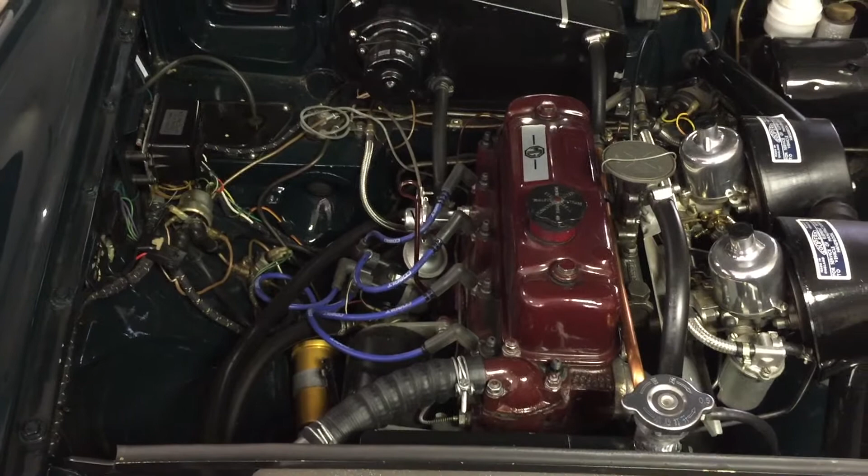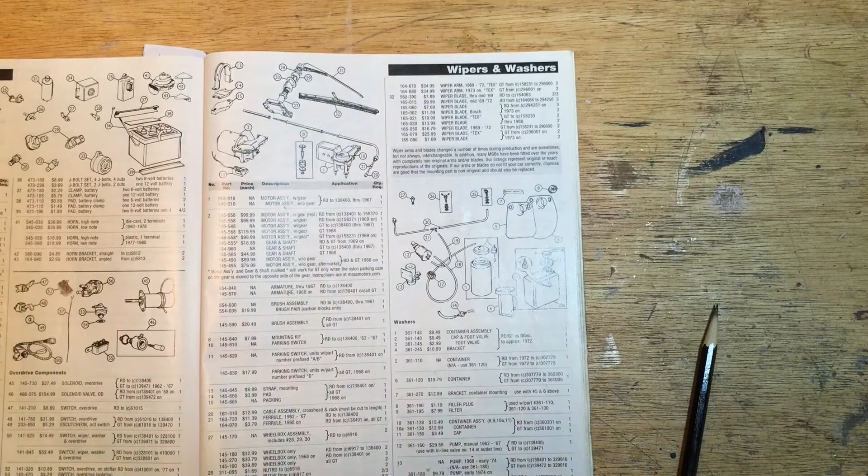So it looks like we don't need to repair the window washer, we need to put one in. So we will go to the Moss catalog and look at the diagram of the washer pump assembly and what we're fixing today. Here is the manual pump, the button that you push.

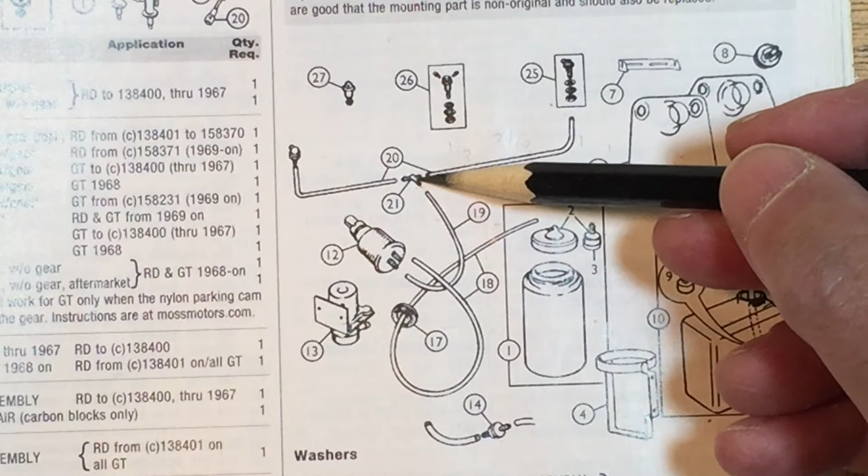Coming off the back of the pump, you have two fittings. One goes to a tube that goes to a T-connector, and from that T-connector, a tube goes to the jet assemblies. The other connector on the back of the pump goes to a tube that leads to the water reservoir.

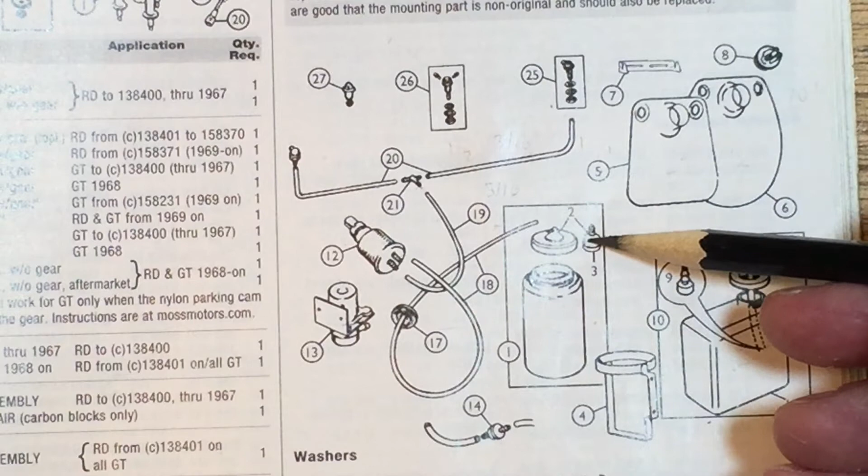The water reservoir has a cap and it has one-way foot valve. The one-way valves are important because this pump has no directionality. When you push the plunger in, water squirts out, and when you release the plunger, water gets pulled back in. So the water just goes back and forth and has no forward motion unless you put a one-way valve in it.

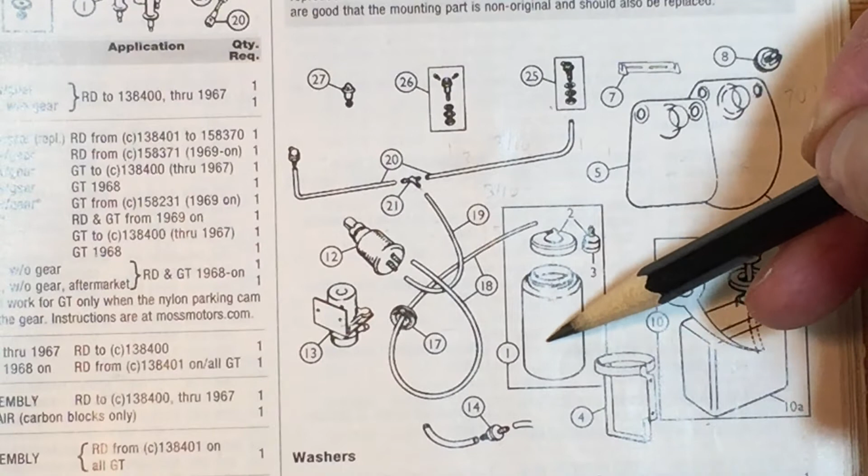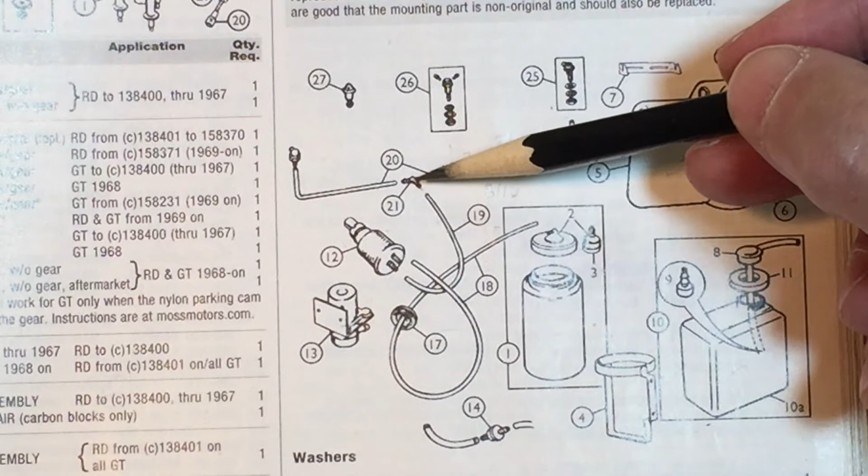The one-way valve in the water reservoir only lets the water go up towards the pump, and the one-way valve pictured here, there's a one-way valve that actually should be pictured here for the sake of clarity, because that valve lets the water go away from the pump but not come back towards the pump when you release the button. Another thing worth noting is this T-connector is 3/16, 1/8, 1/8.

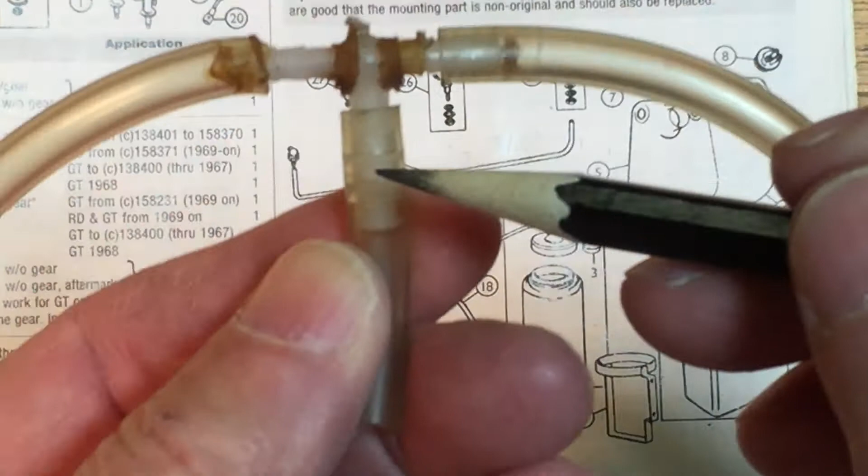Here's the bag that it comes in, and you'll see T-connector 3/16, 1/8, 1/8. Well, what does that mean? It means that this connector is 1/8. Correction, this connector is 3/16, and this one is 1/8.

And this is actually the T-connector that was under the dash. Parts of this system were still in the car. Most of the system had been taken away. And I think it's because they didn't have any one-way valves that their system quit working, and they just threw away the water reservoir.

But let's talk about this size for 1 second, which would make a difference. And sure enough, if you look at what was on the car, the fitting to the intake part of this T-connector is 3/16, and the tubing's pretty tight. You can just put it on there and it won't come off.

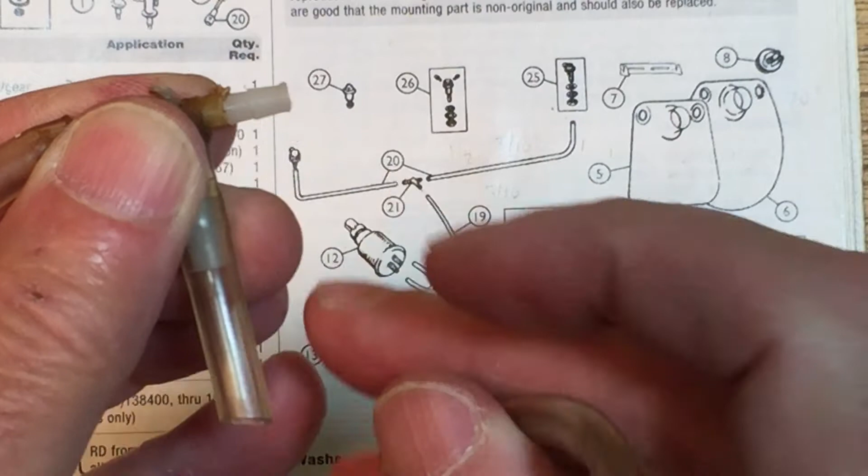This fitting is only 1/8 inch, but they used 3/16 inch tubing, and so when they put it on, it wasn't really very tight. And you can see that they actually put some glue on it in the hopes of making up for the fact they had the wrong size tube.

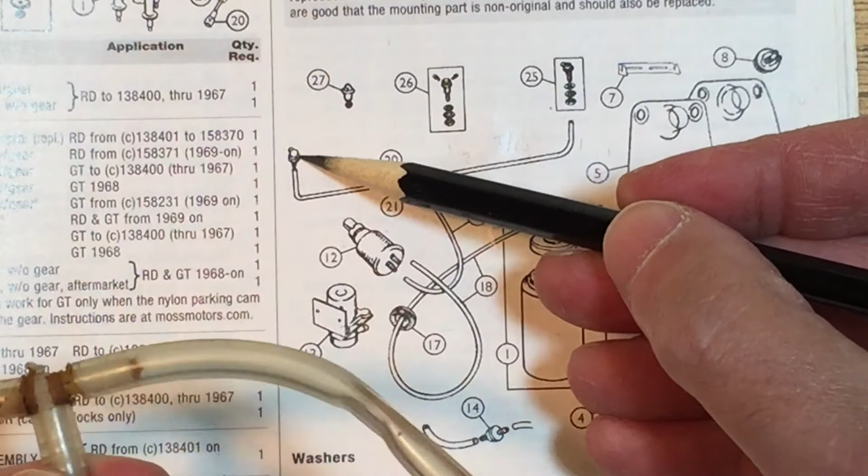And I don't know for sure, but I suspect that when they put their system together, it did not work for two reasons. One, it probably leaked here and at the fitting here with the jet assembly. And the other issue, they did not have a one-way valve. So when they pumped their manual pump, the water just went back and forth and didn't actually come out of the jet assembly.

So let's put together a system here on the workbench to make sure it works before we put it into the car. First, let's look at the pump.

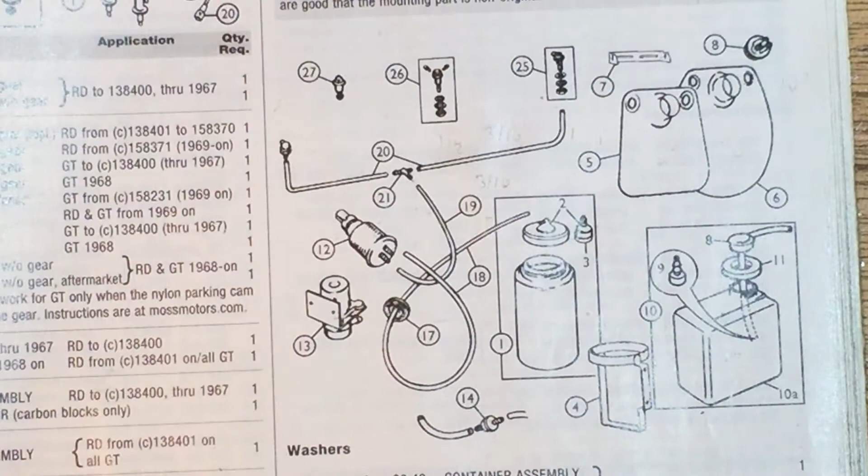Here's the plunger that comes from the front of the dash that we press, and here are the two connectors to the tubing on the back of the pump. We can take this bezel off, and we see that it's a simple plunger and a simple diaphragm.

You press against that diaphragm, and that pushes the water out. In the absence of a one-way valve, when you release the plunger, the water will just come straight back in.

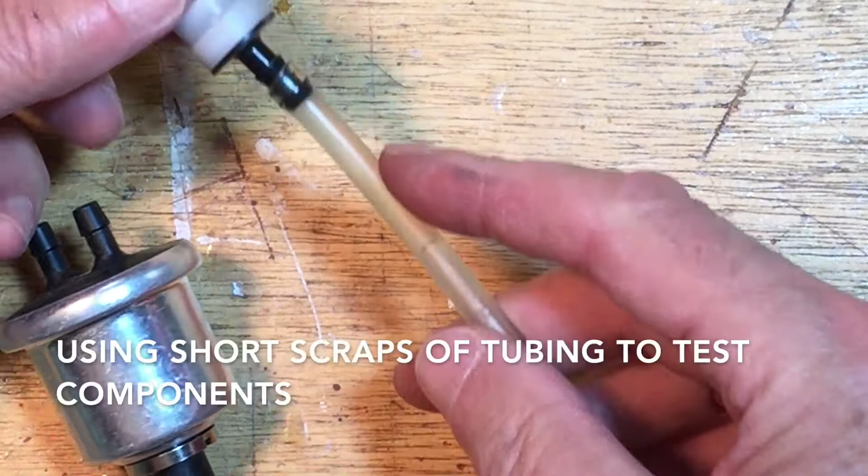So let's put it together and then look at the tubing that connects to the jet assembly. This is the 3/16 tubing, and it goes to a one-way valve. From there, more 3/16 tubing goes to the T connector, and from the T connector, it's 1/8 inch tubing that goes to each of the jet assemblies.

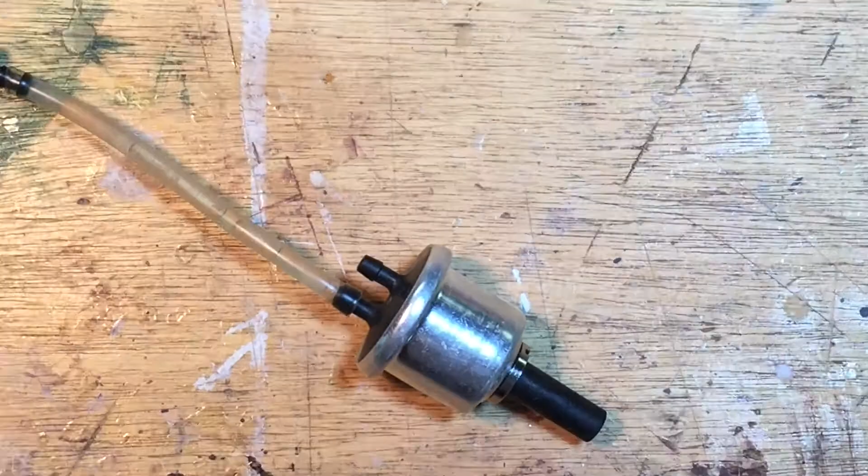So we're going to hook that up to one of the connectors on the back of the pump, and the other connector will go to the reservoir. This is the tubing that goes to the reservoir, and we note that when we take the lid off, at the bottom there's a one-way valve. So we're going to fill it up with water and test it to see if it works.

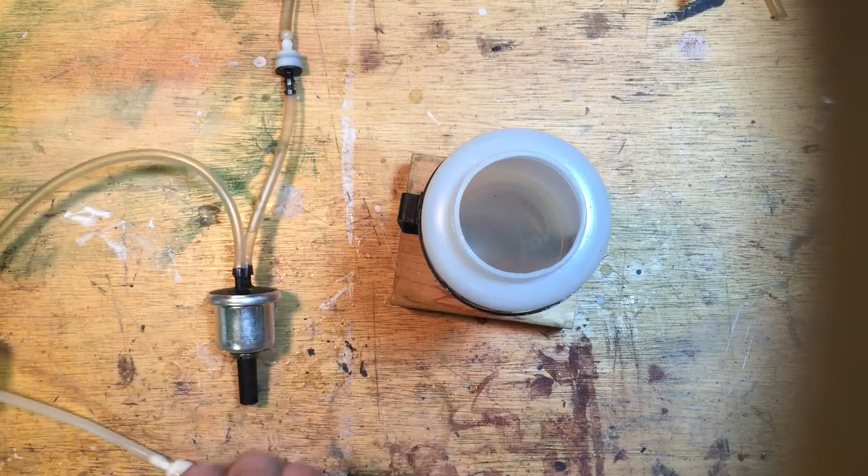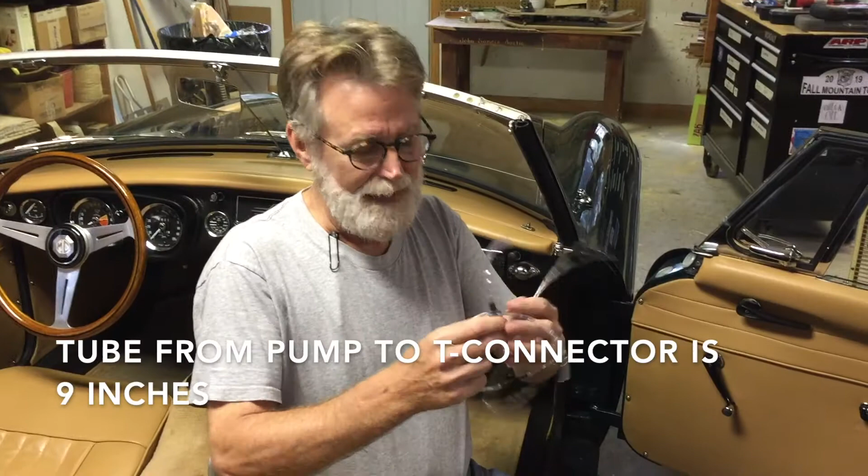So let's test it. I'm going to push the plunger and we'll see what happens. Oh, whoa, stop. Okay, so I've got it put together, and now it's time to put it under the dash.

Which is probably the least graceful moment of the entire endeavor. So you just get up under here like this. It's elegant. Oh my goodness.

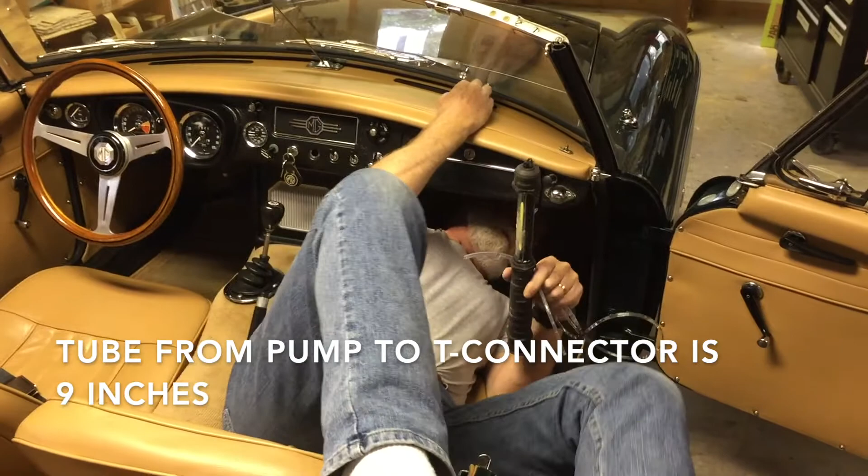Okay, now I've got to have a light, and then you just find that jet assembly and hook - just push the plastic tube onto it, but that's all right.

And I'm hoping that the jet assemblies that are in the car will work, so I don't have to replace them. But if I do, I'll just replace them.

So I'm going to reach through, find that hole, and just push this through so I'll know where it goes. There we go. Okie doke.

And then I'll feed this other piece of tubing coming off of the T connector over to the driver's side. Okay, you can cut that.

Okay, now I'm going to try to get under the dash on this side and see if I can - there it is. I can see the little tube. Now we'll see if I can get it. Oh my goodness.

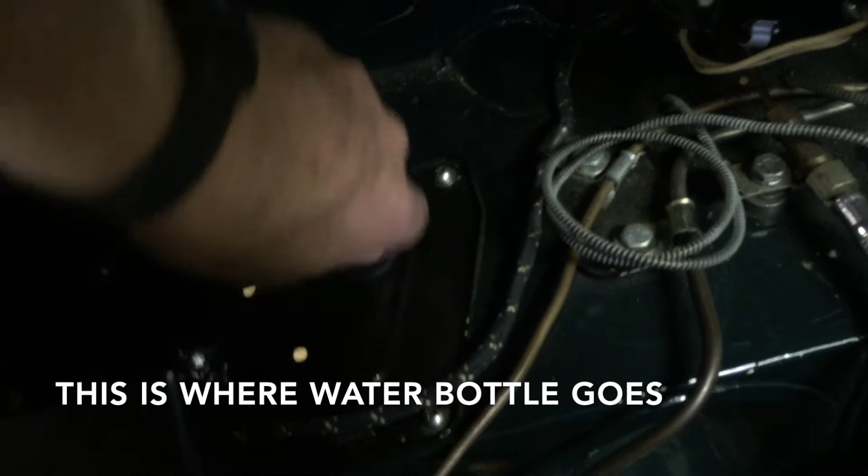Now we will put fresh tubing through this grommet, and it will come out under the dash, and from there we will run it to the pump.

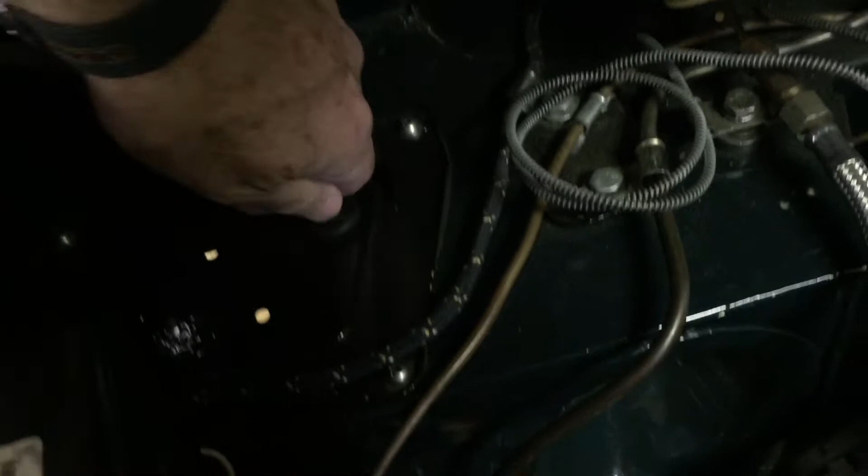The jets were bad, so I had to replace them after all. I put masking tape on the hood so I wouldn't scratch the paint and clamped locking pliers to the jet. I got under the dash, removed the nut, and it worked just fine.

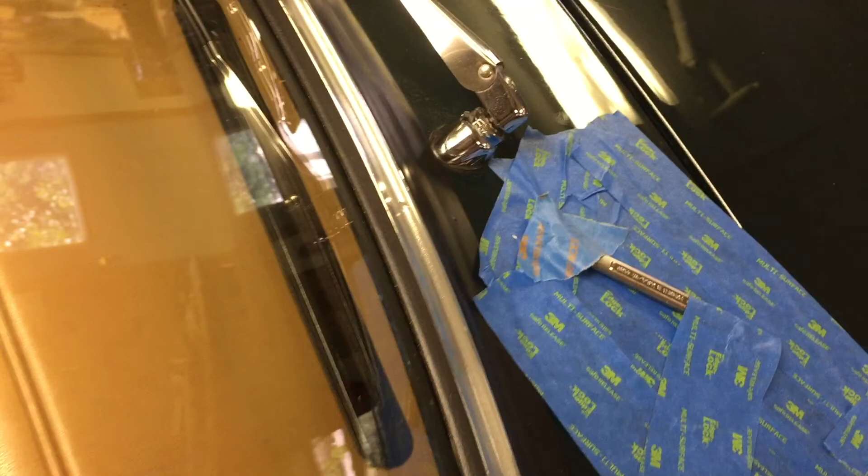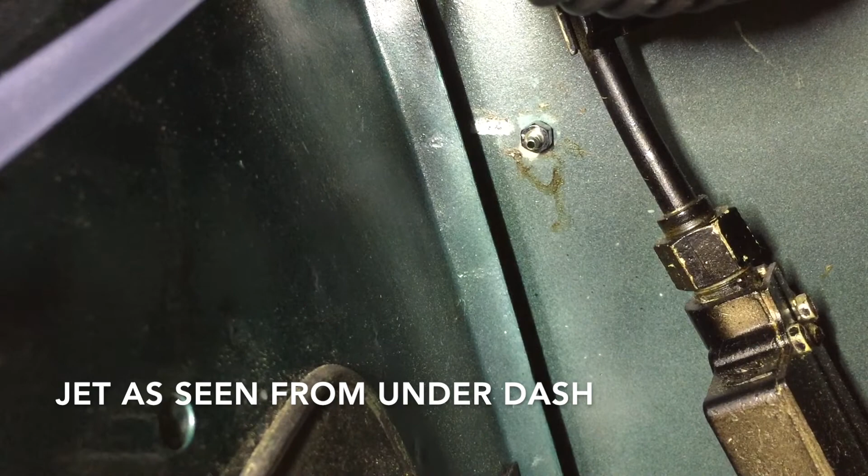I have a new jet in the hole and have an open-end wrench taped into position to hold it in place, and I'll get under the dash with a washer, lock washer, and nut and see if I can thread it. So I got lucky and the lock washer and nut went right onto the nozzle, and now I'm just going to tighten it up.

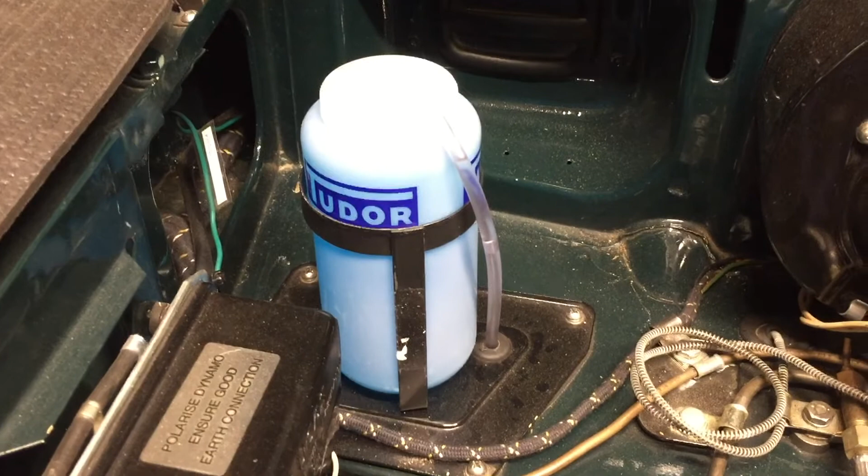System in place. I have filled the reservoir with the blue windshield washing liquid. Now let's see if it works. We're going to push the button and see if it works. Oh, yeah. Oh, man, look at that. Well, I'm glad that worked. Happy motoring.